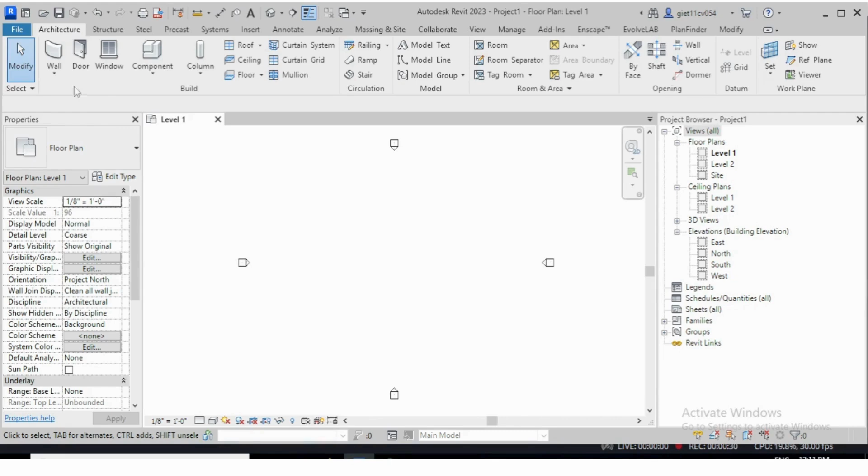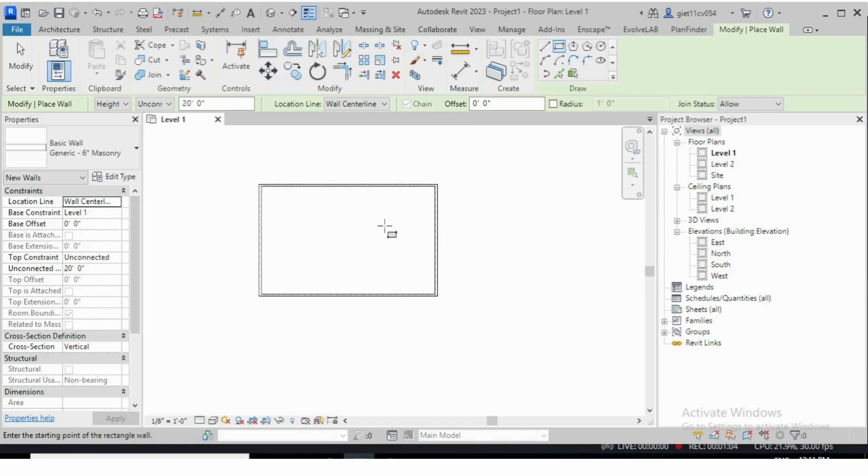Just create a wall. You can see here in Revit I have created the wall. I am just going to use this wall to place our first sweep. Okay, we want to go here on the wall tools, architecture tab, expand the wall.

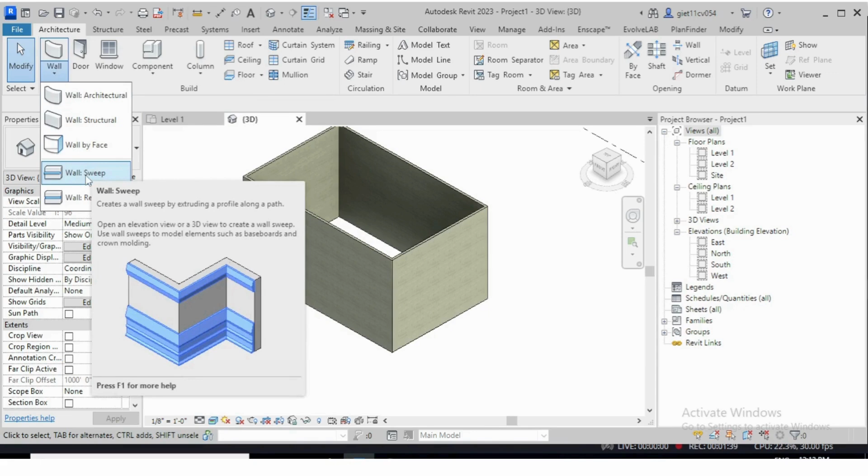First you go in 3D view. Okay, we have this wall. For the sweep we want to go in the wall tab, expand it. You will see the word sweep. Just click on the word sweep. After selecting the sweep, here on the modify tab you will see horizontal, vertical and restart wall. Here you can see horizontal, vertical and restart wall sweep.

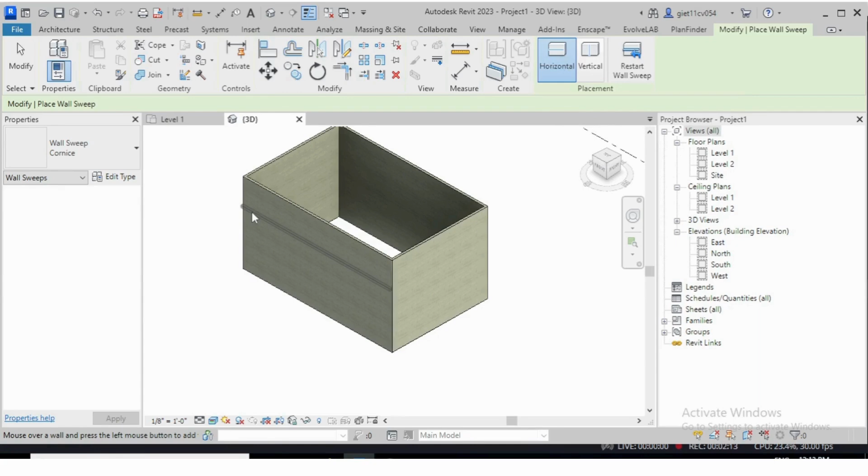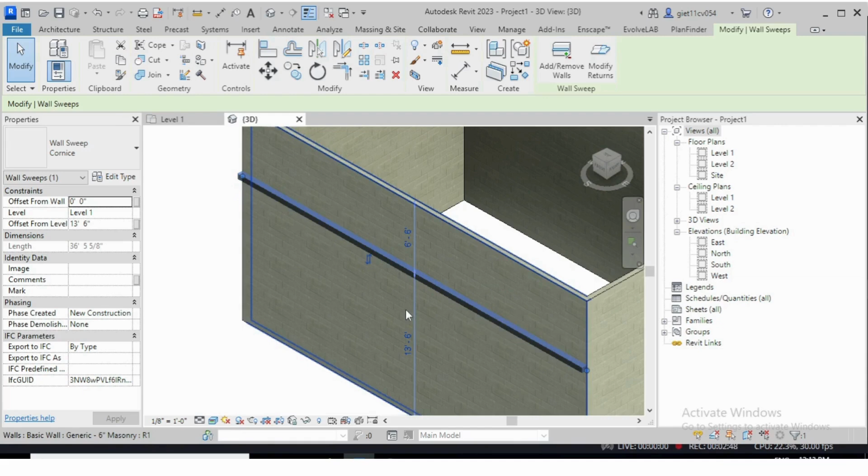In this case I am going to place it horizontal and click here. Okay, so here we have the sweep. Select the sweep. You can flip it up by clicking here. You can flip it up and down. Okay, you can edit the size as per your requirement. Suppose you want 10 feet down, you can adjust it as per your requirement.

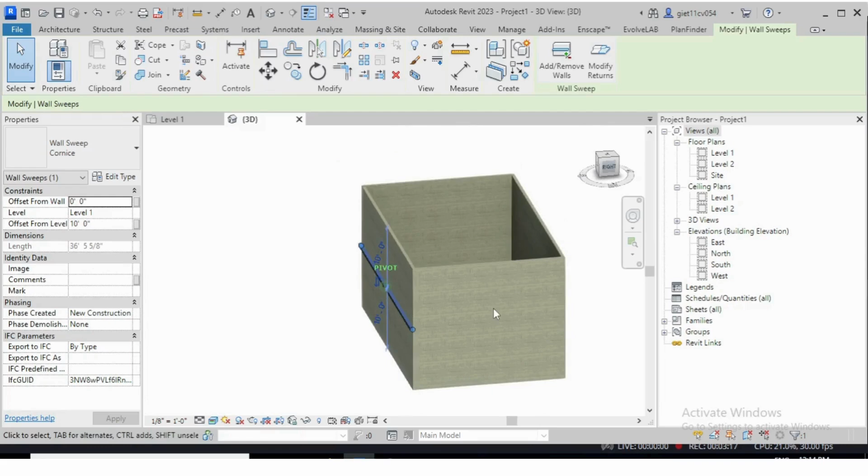Or if you want to add the offset. Suppose you want an offset from the wall. Suppose you want a 6-inch offset from the wall. You can see it's 6 inches away from the wall. Okay, in this way you can adjust your offset. So here we need 0 0. Okay.

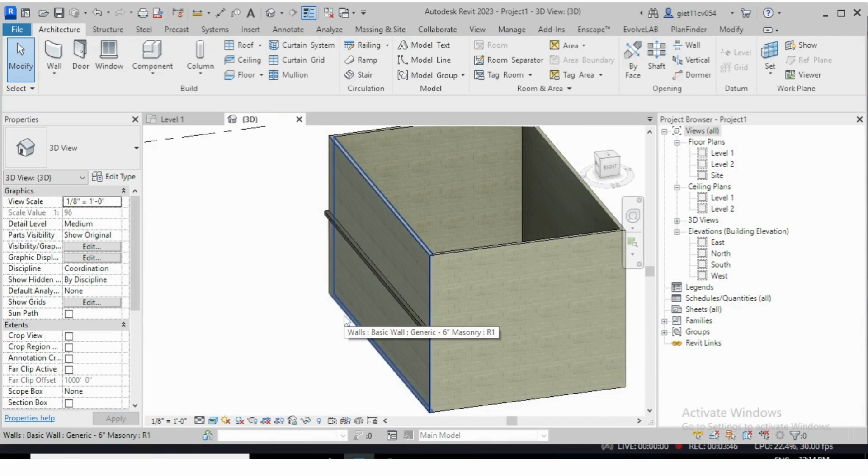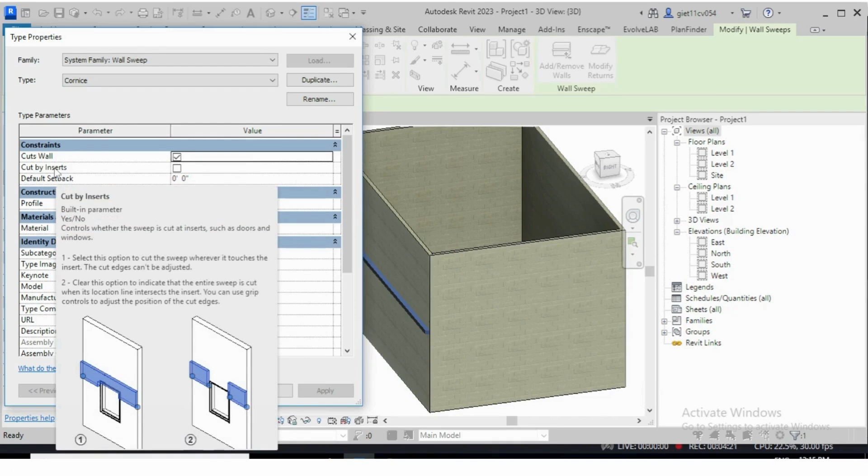Now in edit, you will see here the cut walls checkbox. Okay, cut wall. Here cut by inserts. Cut wall means you can see here cut walls, cutting through the walls, not overlapping. Here cut by inserts, cut by window or not. If we click here and apply it, okay,

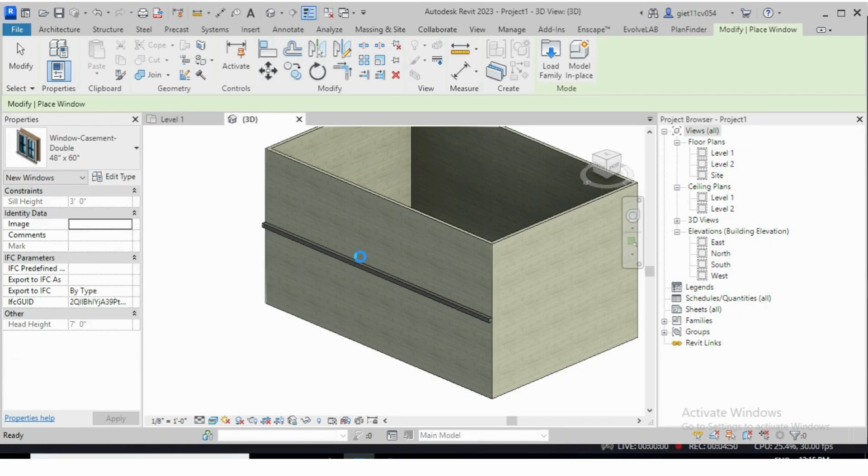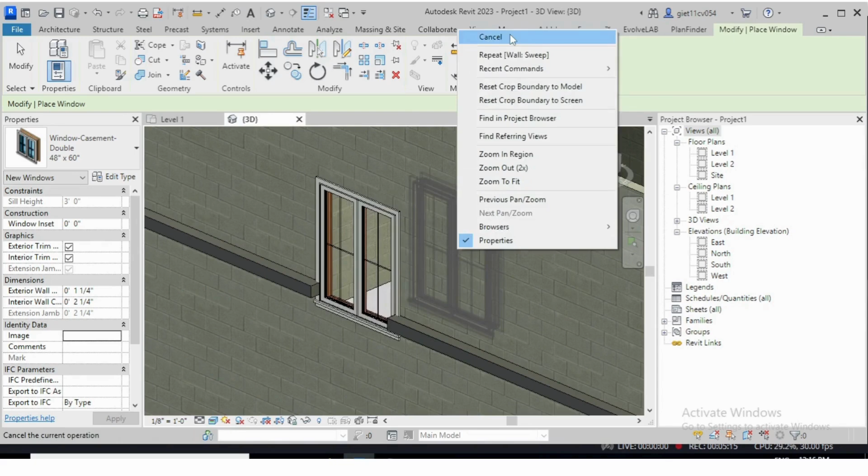if I decide to put a window here, let's see, window. Suppose I place this window here. You can see here it's cut the sweep automatically. You can adjust the window. Suppose you want to place this window here, it will cut the sweep automatically. Okay, in this way you can use the sweep, wall sweep.

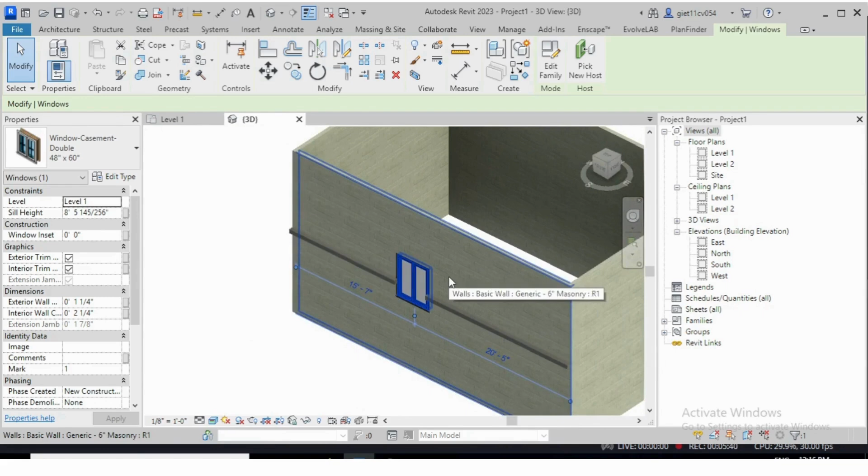Okay, suppose you want this sweep on this side, just click here, add and remove. You will see the sweep has been added to this side also. In this way you can use this sweep, wall sweep.